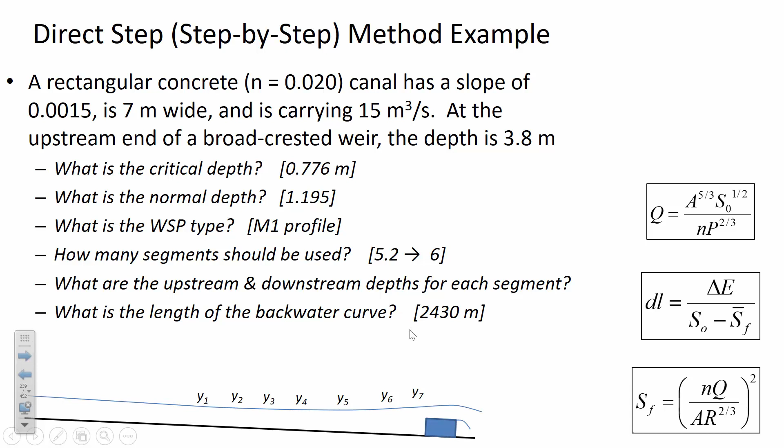And so what we did was we calculated that from this measured location up to where it matches back up with the normal depth was about 2,430 meters. Now, as we'll find through this example, the actual length may be a bit longer when we divide it up into more than 6 segments. So we're going to be adapting this example. Once again, we're using the same 7-meter wide rectangular channel.

And let's say that we have a 4-meter height that the water can be flowing through. If we think about this as like a rectangular trough that the water is going down and it's 4 meters tall on either side, but we don't necessarily know how deep the water is within that trough, except at this one control point where we have a measured depth of 3.8. So this is going to be what we call a boundary condition. And the boundary condition is just a location where we have a fixed measured known value, and then we work towards the unknown starting with that given.

Of course, the other things are going to stay the same, like the channel slope, the flow rate, the roughness. So all of that's going to stay constant. We're going to try and put that into HEC-RAS. Now, one of the tricky things in HEC-RAS is that the editor for defining what the channel geometry looks like is basically an XY coordinate system that we have to utilize.

By the way, does somebody have a marker here today? I forgot to grab one as I left my office. I can always count on you to hook me up. You've got so many colors to choose from. Thank you very much. All right.

So if we're going to be thinking about this rectangular channel, the things that we're going to be trying to find out is, first of all, in part A, if we go 1,500 meters upstream from the control point, how deep is the water? That's one thing that we're interested to find. And then the other is, how far do we have to go upstream until the water depth is within 1% of the normal depth? And we're saying within 1% because if we said exactly equal to the normal depth, because of the way that the numerical solver works, you almost never really get back to the normal depth.

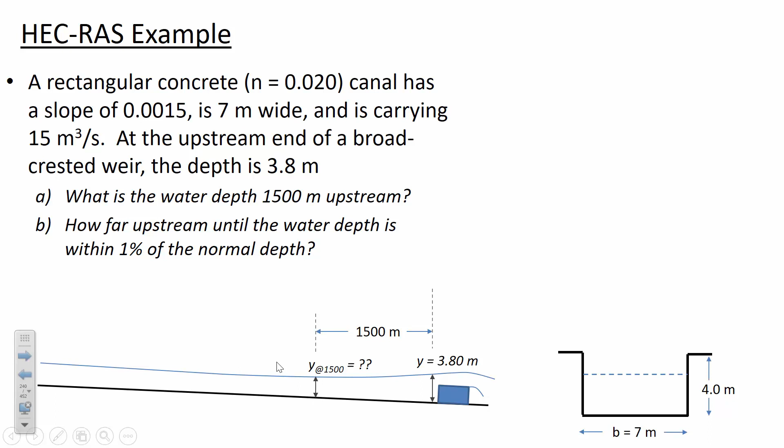That situation is analogous to this, where if we said we want to go all the way to the normal depth, this curve is going to be very infinitesimally still curved, but if we say within 1%, then it's essentially the normal depth, but we don't run into the problem of it being an infinitely long distance.

Okay, so just as a reminder, when we analyze the critical depth for a rectangular channel, we can use this easy approximation, the critical depth 0.776 meters. Solving Manning's equation with this channel geometry being rectangular, the slope, the n value, we get the normal depth. So within 1% of the normal depth, we're saying we want to know how far do we have to go upstream from this weir until the depth matches back up to 1.207 meters. So those are the two things that we're going to try to be solving.

Now the slope that's given, 0.0015, we kind of have to manually calculate what our elevations are going to be. And if we say, let's have the bottom of the channel be our elevation datum just upstream of this weir, so z equals 0 by our definition. We could have called it 10, we could have called it 100. Let's just call it 0.

Then if we go 3,000 meters upstream, that tells us that the channel bottom should be 4.5 meters as elevation. And that's just multiplying this 0.0015. That's 0.0015 meters of elevation for every meter of horizontal length that we're moving upstream. So if we're moving 3,000, the delta z is 4.5. Okay, so is everybody with me so far on what the geometry of the channel looks like? Everybody understand what we're trying to figure out with HEC-RAS?

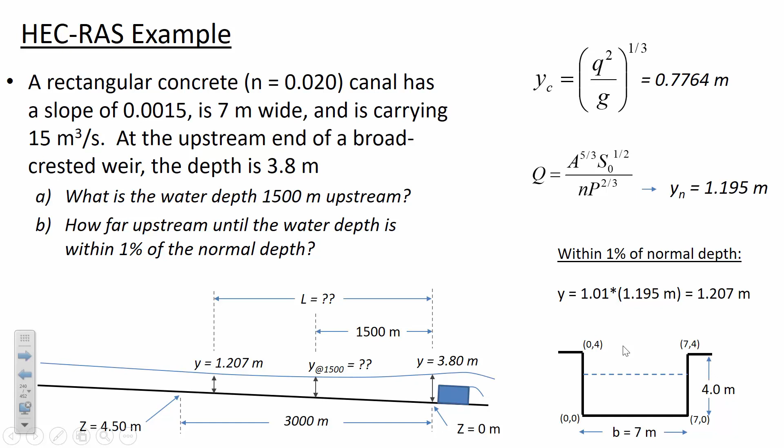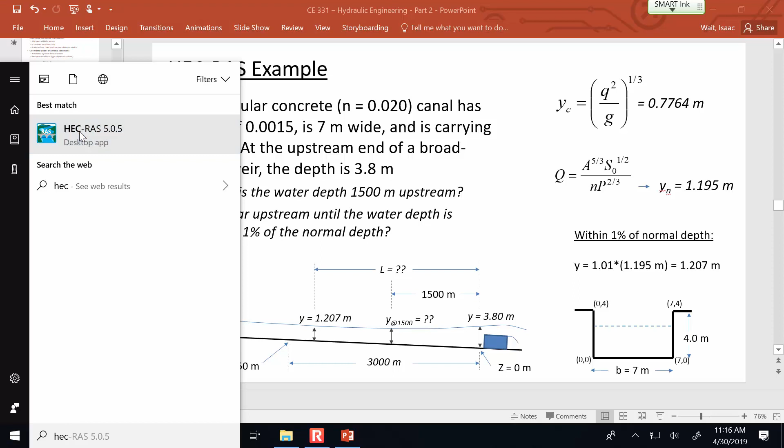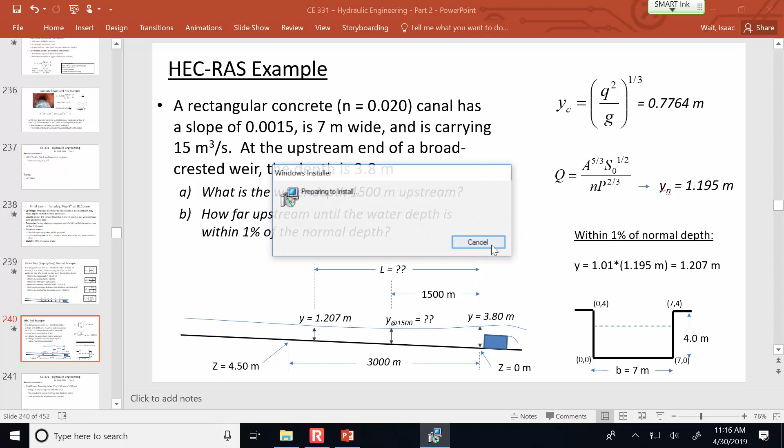All right. Well, let's start up the program. I'm not sure if it's installed here on this machine, so I'll probably have to, oh, it is, good. I was going to remote into my desktop, but this is even better. Autodesk Inventor. Not sure why it thinks that's what we want. Maybe I will remote into my machine. All right.

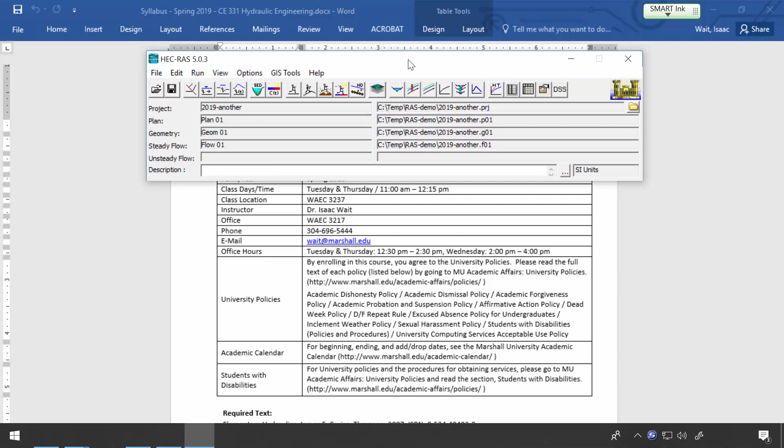All right. So let's start from scratch. New project, and we'll give it a name. You put it in a directory that you're going to be able to find again, and my suggestion is to create a separate folder. Don't just put it on your desktop, because it's going to create several different files as we go through the process of creating geometry and doing a steady state run.

So create a subfolder here with this button. I'm going to go into my temporary folder, and I'll call this 331-RAS, and create that folder. And then I'm going to call it Tuesday Demo. All right.

Now it looks like the units are, it just gave me a warning that my unit system is US customary. Oh, no, System International. Okay, that's what I want. But in your case, down here at the bottom, it's confirming what units we're in. By default, I think it probably comes up in US customary units, so you're going to need to go to Options, then Unit System, and switch it from US customary to System International. Okay. I'm going to set that as the default.

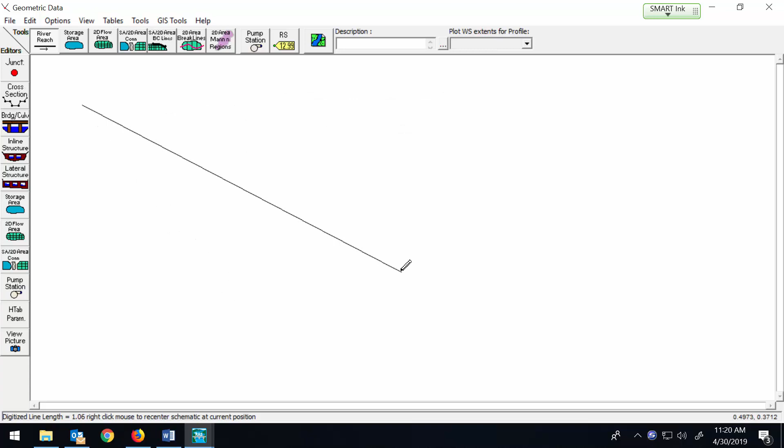All right, so click on River Reach. This is a top view. That's the start of my river, I'm moving over sideways. It doesn't matter if it's low or if it's high. This is just like a schematic diagram. It's not implying any particular length, but double click at the end. By double clicking, that means we're terminating this river.

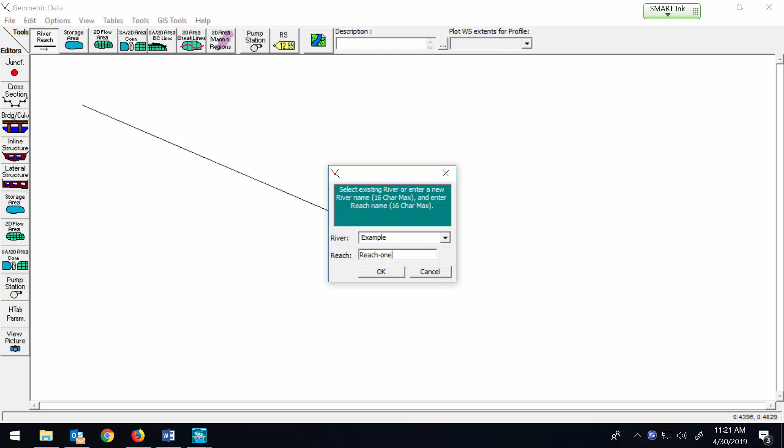I'm going to call this river Example, and the reach is going to be Reach 1. Now, you can have multiple reaches on a river, meaning that, for instance, there may be side channels going up some particular holler, but they're all part of the same river system. All right, so it's got a name, and you can see it's put it in that top view, and the direction of the river is implied by where I clicked first and where I clicked second.

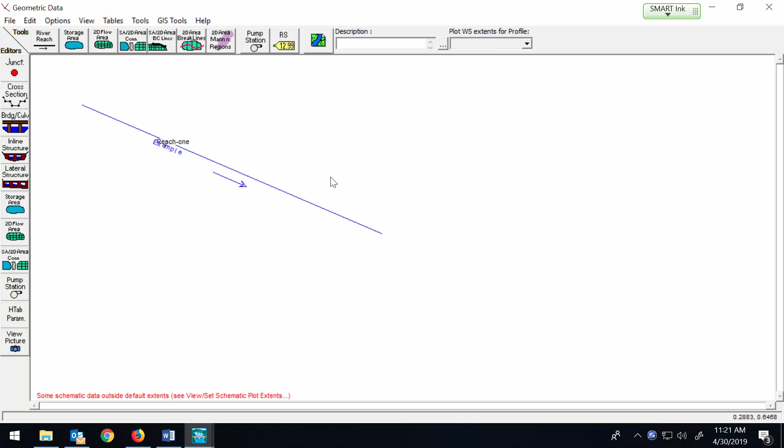All right, so next we want to create some cross sections. So we're going to add a new cross section. Here, under Cross Sections, edit and/or create cross sections. Click on that. And here's the box where we're going to enter the XY coordinate data. We're going to start with this location 3,000 meters upstream.

Just to refresh your memory, I think we might be able to create one model that answers both questions, because we're essentially trying to figure out how far of a length until it gets to 1.07 meters. So if I create this entire segment of 3,000, I suspect this unknown length is going to be within that 3,000 meter distance. And the other thing I want to know is what's going on at 1,500 meters. So I'm starting at the upstream location.

So let's put in the coordinates. Now, the upstream location, the geometry looks a little bit different. This is our downstream section, the x and y coordinates for the downstream. But the upstream, because the z is 4.5, that means this top left is going to be 0, 8.5. The bottom left is 0, 4.5. So these are x and y coordinates.

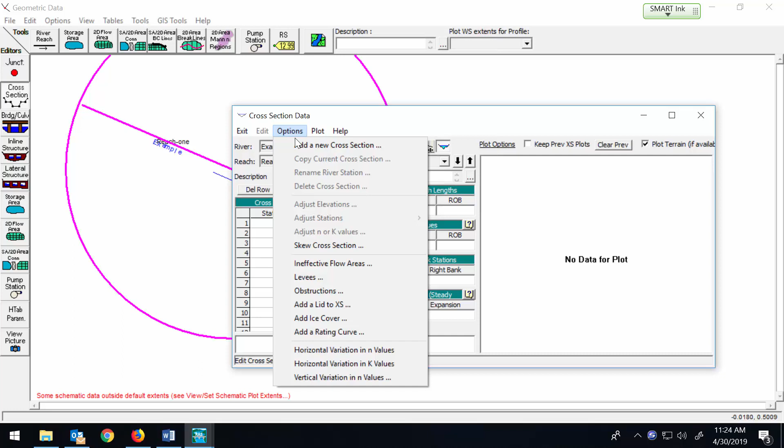So Options, Add a New Cross Section. And it asks you what's the station, meaning how far upstream or downstream is it? So again, we're on the cross-section data, Options, Add a New Cross Section. We're going to put this in at 3,000. That station means it's 3,000 meters upstream of where we've measured the depth. So at station 3,000, and now it's naming that station 3,000.

Now hopefully we'll be able to type in the coordinates, the x and the y. So 0 is the station. The station this is talking about is measuring the cross-section starting at the left side. So there are the stations that run along the length of the river, and then there are the stations going side to side to define the channel geometry.

So this station is just saying how far from the left edge of the channel are different features. And so 8.5 is that elevation. And also at 0 is elevation 4.5. Then at station 7, 4.5, 7, 8.5. So why 8.5?

Well, remember that what we've said is that this is basically like a trough, a 4-meter tall trough that is going upstream. And so if we have the z is 4.5 meters and another 4 on top of that, it means the top of the channel will be at 8.5.

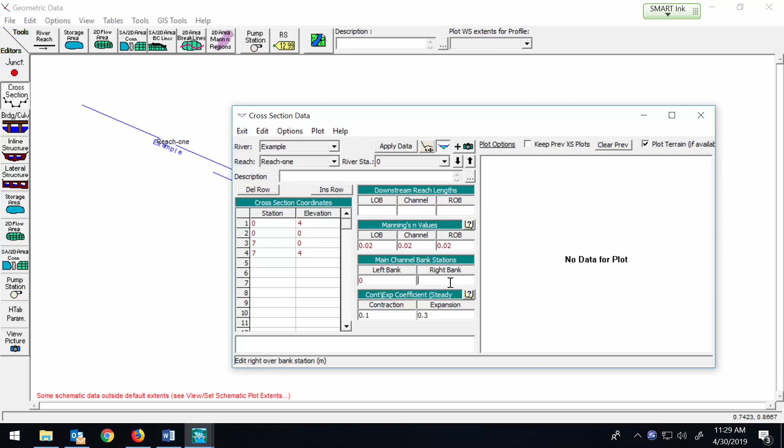The n values have already copied over, which is good. And then the left bank is at 0. The right bank is at 7. And we click Apply Data. And the bottom of the channel is down at 0, so it's at our elevation datum. The top goes up to 4 on both sides.

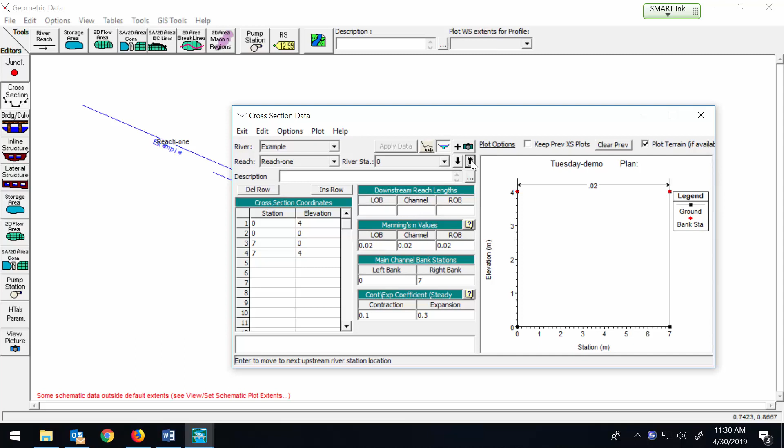So what we have right now is 2 stations, and we can toggle between them using these arrows. We've just got these 2 segments. But the nice thing the program will allow us to do is interpolate linearly between these 2 sections. So if we do it in 300-meter segments, if I wanted to break it into 10 segments, then I could type it in manually a bunch and have to continue calculating what's the delta z and all that. Or we can just see about interpolating it automatically.

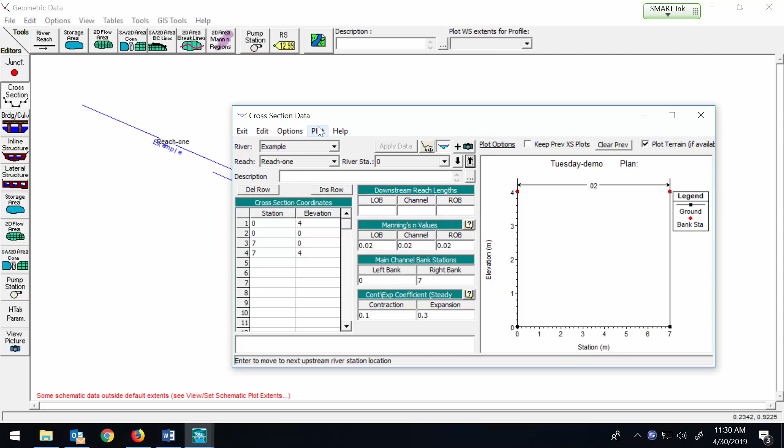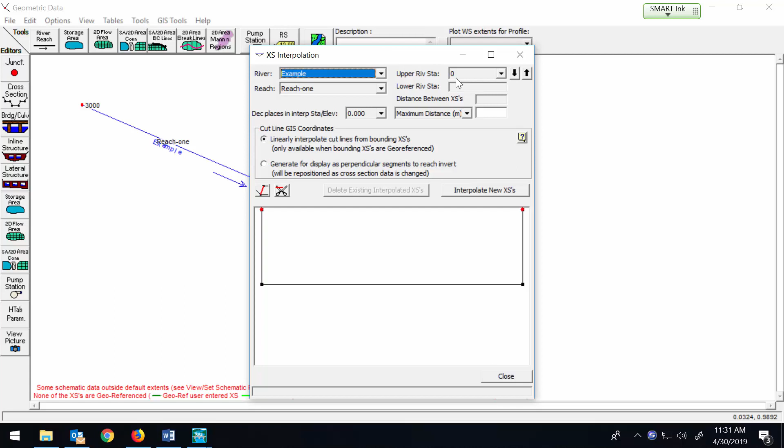All right, so under Tools, I think what I do is close this window. Tools, cross-section interpolation, and we're going to do it between 2 cross-sections. Okay. So it'll bring that up, and the upper station is at 3,000. The lower station is at 0, so it knows which 2 stations it's going to be interpolating between, and it reports back that it's 3,000 meters between them. And then let's have it be a constant distance of 300 meters.

Just to see what happens. All right, and then click Interpolate New Cross Sections. All right, so it looks like what we're seeing here is a front view of all of those different cross sections, and so we can see that the initial depth is down here at 0.

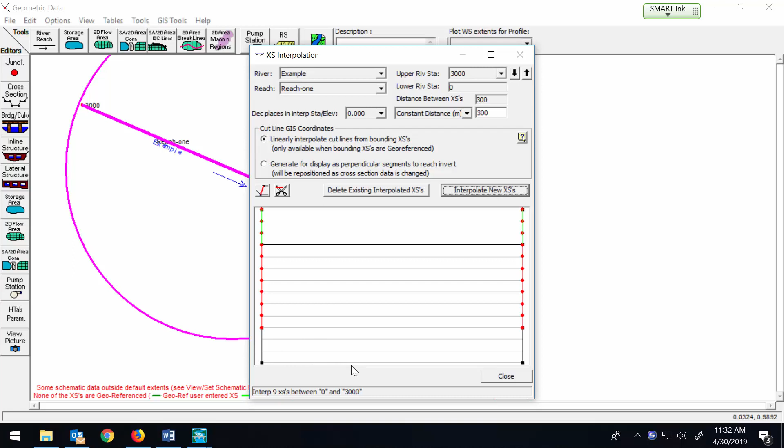Then, well, we can close that and investigate each of these sections together. So if we bring up the cross sections menu again, then we can flip between them. So if we go starting at the 3,000 now, 2,700, 2,400, and so check the elevations, and so we're at 4.5, 4.05.

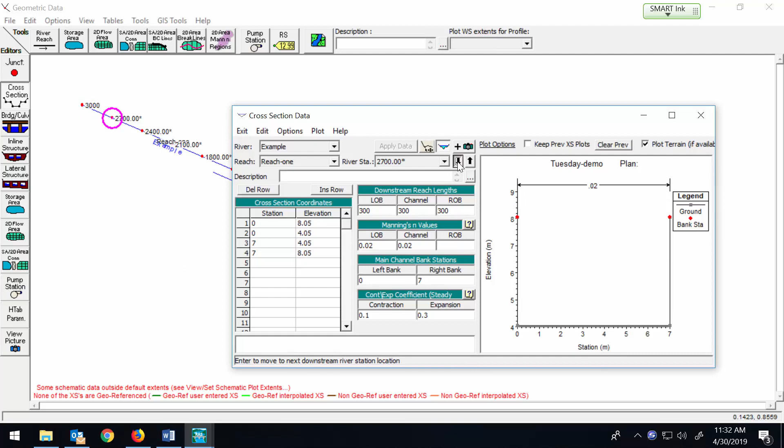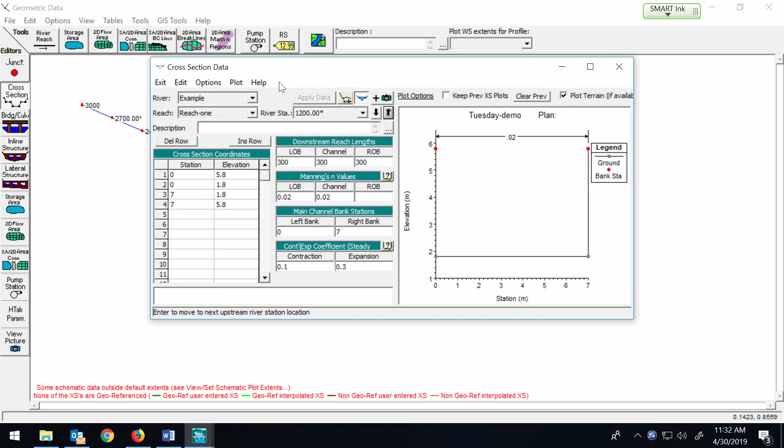So what it's done, and you can see in this window, it's continuing to highlight the cross-section that you're on as we go down, and it's rescaling this view on the side, but it's measured all of these reach lengths, and then we get to the end. We get to 0. All right, so it seems like it did what we would want it to do in interpolating those. And so we can close this, and then maybe it's a good time to save.

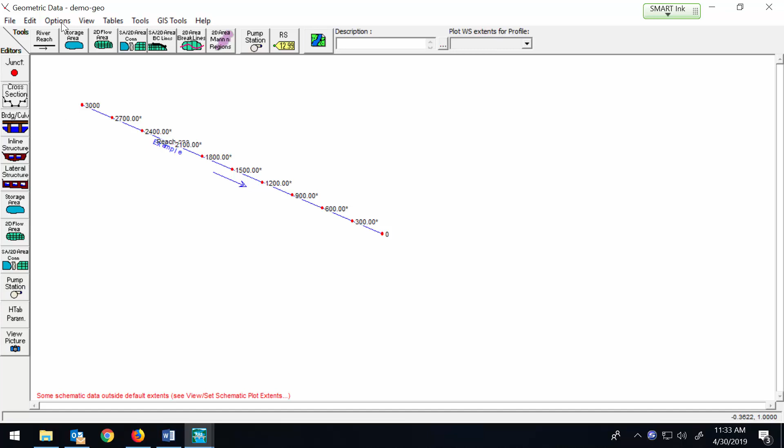File, save geometry. So I'm going to call this demo geo. All right, so now I've saved the geometry. All right, let's take a look if we close this geometric data. This is still open, so let's save everything. Click the disk symbol, save everything, and now it tells us we've got a project, we've got geometry.

What we haven't told it anything about yet, though, is we haven't told it about the 15 cubic meters per second, and we haven't told it what the water depth is at that location where we know it. Remember, at this control point where we've measured the depth and it's known to be 3.8 meters, well, HEC-RAS doesn't know about that yet. So let's give it that information.

So here is view/edit steady flow data. So the Q is constant. That's, I guess, a symbol for steady flow, whereas here it's unsteady flow because the flow rate is going up and then it's going down again. So we're going to do steady flow. Click on that. And let's set PF1 to 15 cubic meters per second.

So see down at the bottom, it'll give you hints on what it is we're entering here. Edit steady flow data for the profiles. And so the water surface profile, we want it to do a graph of what's happening at 15 cubic meters per second. If we wanted to, we could add in other flow rates and it could analyze them in the same model so that we could flip between, show me what does the water surface look like at 15 cubic meters per second, at 20, 25.

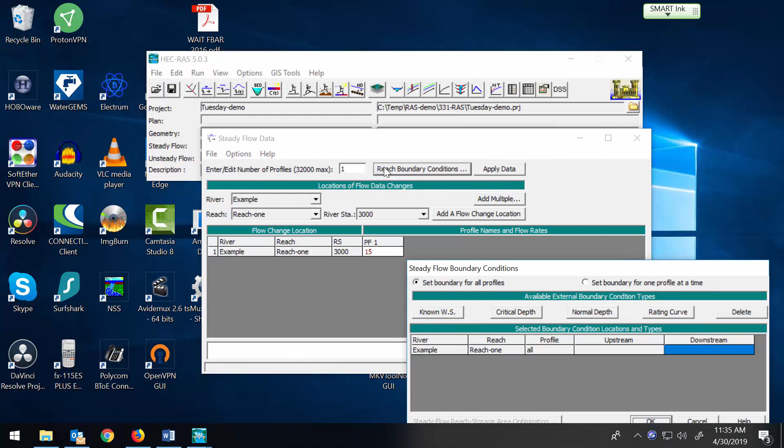So we could add additional rows to this, but we're just going to analyze it at the single 15 cubic meters per second. All right, now we also need to set a boundary condition. So here under Reach Boundary Condition, click on that, and we have a few different options. There's different things that you can tell that are governing. And in our case, what we want to have it do is start with a known water surface. So it's this downstream known water surface.

When the flow rate is 15 cubic meters per second, then the known water surface elevation is 3.8 meters. So 3.8, and it's asking as an elevation above the datum. It's not just asking about the depth, and so it's kind of just fortunate for us that we said that our datum is going to be at the bottom of the channel at that downstream section. You know in the homework how you had to keep track of a separate depth versus water surface elevation? Here they're one and the same.

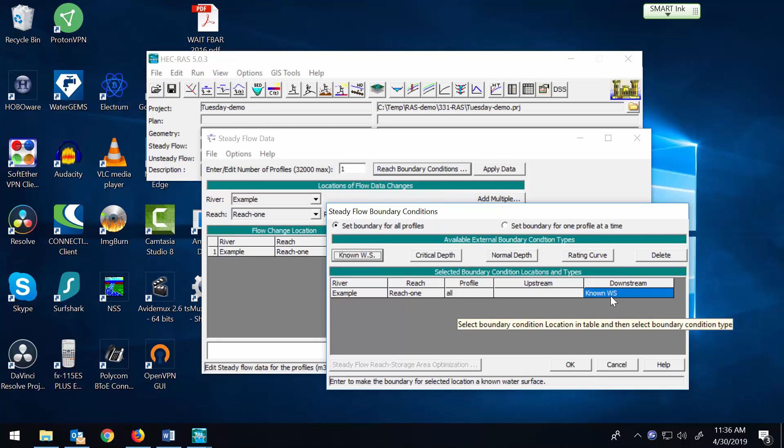Okay, so click OK, and now it says that what's governing this boundary condition is the known water surface elevation that we've just set. Okay, so we can click OK and click Apply. I think it automatically applies, but let's click Apply just in case. All right, so everything's set. Save flow data. Example flow.

Okay, so now if I want to open this up in the future, it would already have the project defined, which is that top view of my system of rivers and reaches. It would have the geometry defined and then our steady flow conditions. So now what we're going to do is perform the steady flow simulation. These icons are the greatest. See the guy that's running on a flat line? So that's a steady flow run. I guess he's running. So we're going to run the model steady.

So click on that, and we have subcritical flow regime. And how do we know that? Well, because we calculate the critical depth is less than the normal depth. Okay, so subcritical is correct. It knows the right geometry file. It's got the correct input for the steady flow file. So in other words, it's sending this water through this channel. And click compute. Hopefully no error messages.

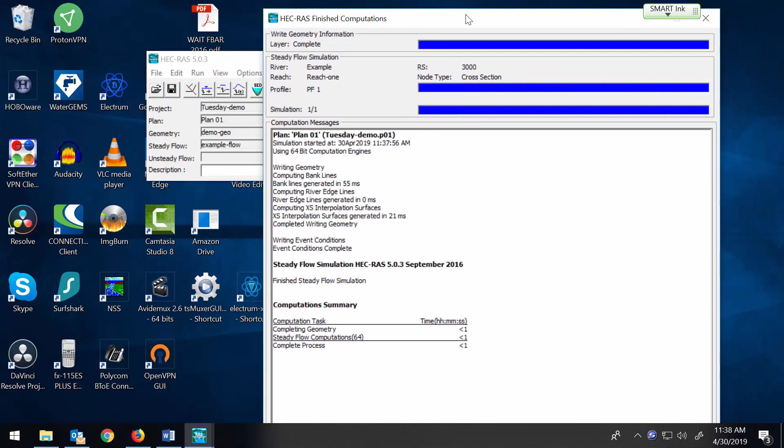Seems good. All right. So now what we can do, close this, and let's take a look at the cross sections again. With any luck, what we'll see is that there's water in those cross sections. There it is. There's water in those cross sections. So here we are at River Station 1200. Let's go down to 0.

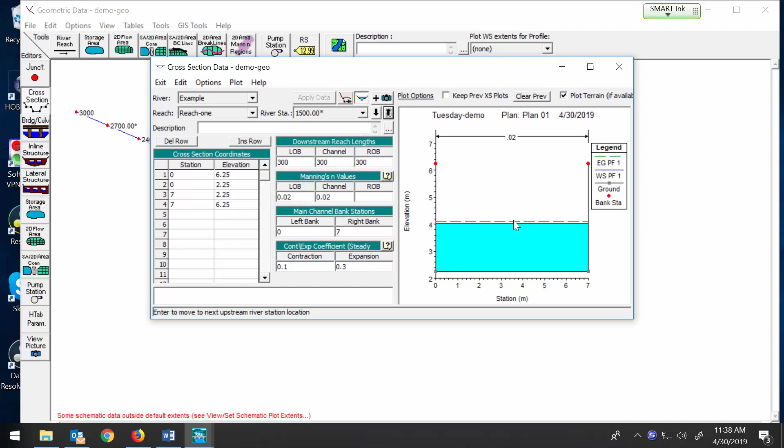So is the water depth at 0 what we told it to be? 3.7? Yeah, it looks like it does have that 3.7. But as we work our way upstream, for instance, we wanted to find out what's happening at 1500, right? That was one of the questions in this example: what is the water depth at 1500? Well, we can see from this graph that it looks like about 4 meters of elevation is the water surface elevation there.

And then what we would do is subtract out the bottom of the channel. So the actual water depth would be 4 minus 2.25. So it's about 1.75 meters. In just a bit, we'll take a look at copying this data and pasting it into a table. But if we're just visualizing things through the cross-section, the depth of the water is from the bottom of the channel up to the end of the blue.

All right, so it was 3.7, and now it's down to about 1.75. So it's definitely getting shallower as we move upstream, which is what we expect. Remember that we expect that it's eventually going to match in with the normal depth, 1.2. So it's getting close already. It's at 1.75 here at 1,500 meters upstream. So the question is, how many segments do we have to go until we see this depth of 1.2?

So if we move upstream again, now we're at 1,800 meters. It's getting a little trickier. I wish there was some easy way to dimension the depth on this cross-section. There probably is a way, it's just that I don't know it. We will take a look at the table in just a moment. But as we keep working upstream, what we see is that the water depth is getting shallower. Eventually, we get to this 3,000.

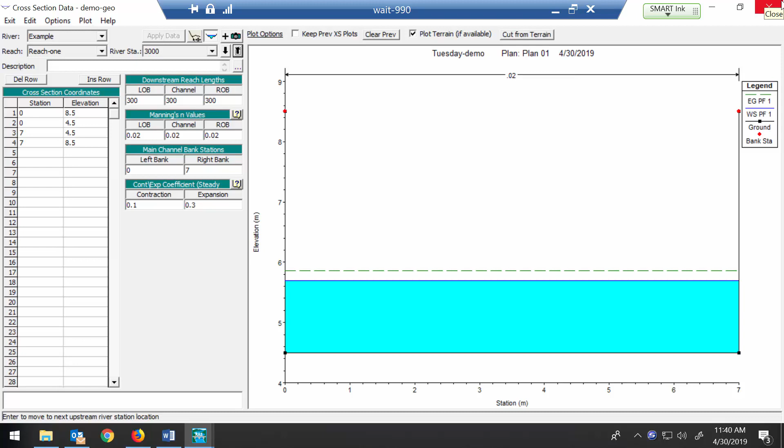And so let's take a look at getting the view table. And so here under tables, no, actually, I don't think it's there. We're going to close this. So back here in the main menu, we've got a summary output table by profile, and we can also do it one cross-section at a time. So if we go back to that 1,500, which is a point of interest for us, it'll tell us the exact water surface elevation at that point.

It doesn't give us the channel, oh, there it is, the minimum channel elevation, 2.25. So the depth would be the water surface minus this minimum channel elevation. Though it doesn't look like they've done that. Oh, wait, hydraulic depth, there it is, 1.77 meters. Okay. So the depth is 1.77 meters at that halfway.

So then let's move upstream, because what are we looking at? We want to see we're within 1% of the normal depth, so 1.207. Okay, so if I go upstream again, and I'm keeping an eye on this one, are we at 1.207 yet at 1,800? No, the hydraulic depth is now at 1.48. We're looking for 1.2. Okay, 1.29. We're getting pretty close at the 2,100. 1.22.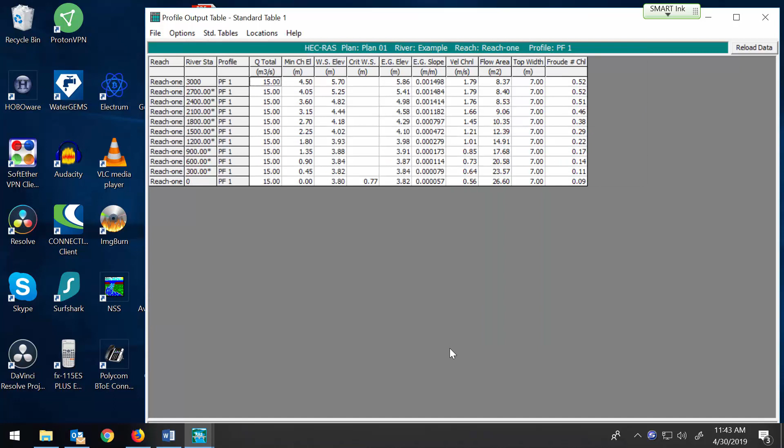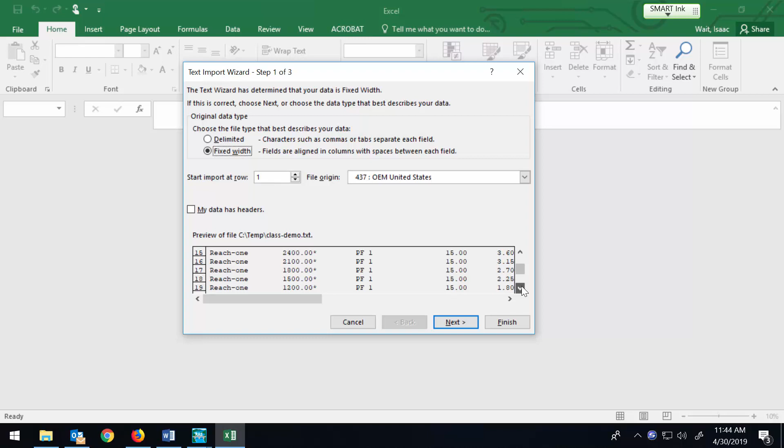All right, so I'm going to call this one class demo.txt, and then if I open up Excel, let me open up that class demo text file, and we'll just take a look at what's in there. So we're getting the import wizard here. I'm not sure how this is delimited. Maybe spaces? Yeah, might as well.

No, it's not giving us a tremendous amount of precision here. Like if the main thing we want to know is the elevation, yeah, that's an interesting question. Let me ask some of the people I know who are a little bit better at the program, because I'd be curious to know if we can get a greater degree of precision.

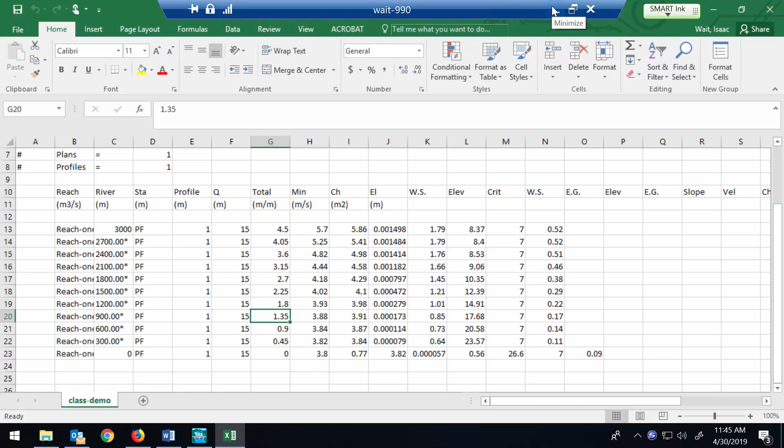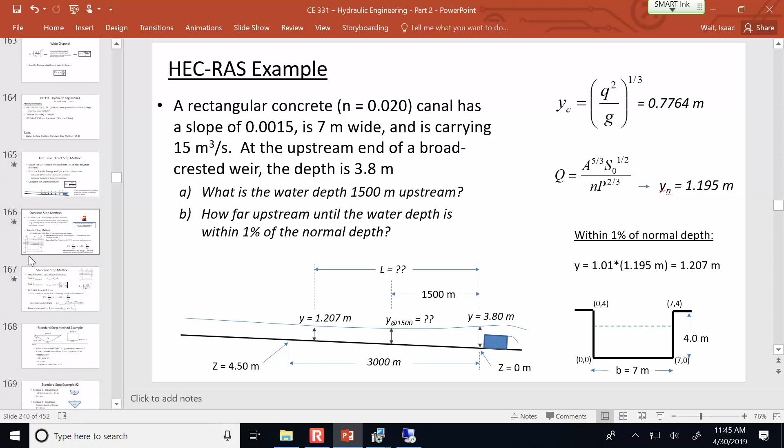All right, here's what I'd like to do. I would like you to try solving another one of these problems that we've worked in the past using HEC-RAS, and it is the one where it transitions from a trapezoidal channel to a rectangular channel. So let me bring that up. Let's try and adapt this example.

So it's in traditional units. We've got an n value. We've got an expansion coefficient defined. So in this one, the water depth was known to be 5 feet at section 1, and then we were working upstream towards this rectangular.

And the cool thing is HEC-RAS is going to be able to gradually open up that transition. So we aren't just going to be doing it in a single step, like immediately going from rectangular to trapezoidal. So my suggestion is let's do 1,000 feet between them.

So define this downstream section 1, define the upstream section 2, and of course the station will be 0 for section 1, station will be 1,000 for section 2, and then have it interpolate in increments of 100 feet. And then let's find out basically what's the water depth doing at each of those locations, and the location that we're most interested in is going to be at section 2, where we want to find out what is the water depth there.

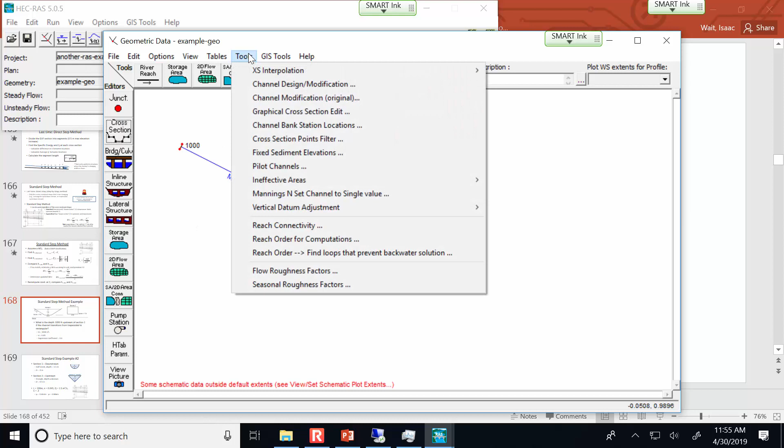So the known is this known water depth is 5 feet at section 1. And so we're working upstream. We want to know how deep the water is going to be there. So whenever I switched it back over to custom reading, just for the sake of trying, it looks like everything remained the same as far as the coordinates? Yeah. All right. Cool.

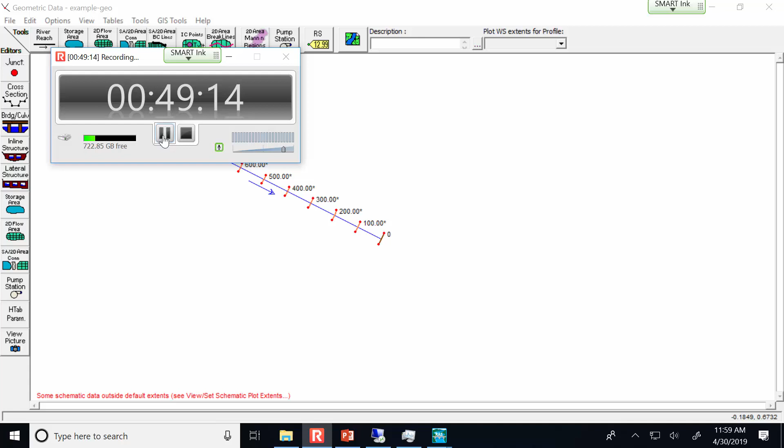Okay, so after you interpolate your cross sections, and here's my starting cross section. I had 0, 10, 10, 5, 35, 5, 45, 10. That defines the trapezoid. Okay, and then the other one that was defined was the 1,000. So just to go back here, 0, 10, 10, 5, 35, 5, 45, 10. That's the cross-section of the trapezoid.

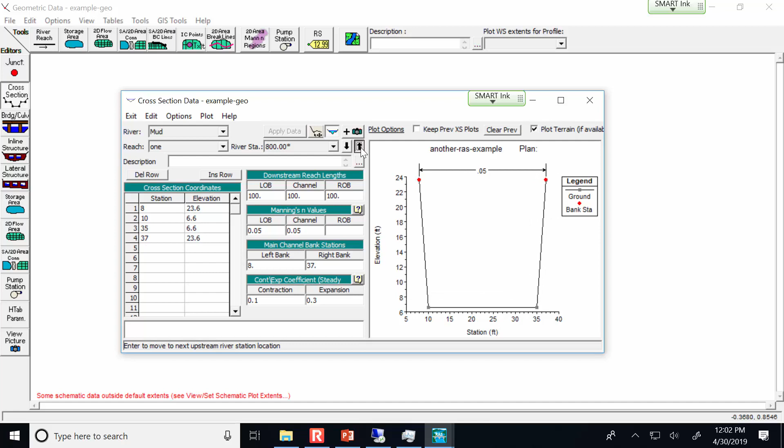And then at 1,000, it was this rectangle, and I interpolated. And if you scroll through, you can see that gradually in the interpolation, what it's doing is it's becoming less trapezoidal and more rectangular until finally we get up to 1,000 and it's perfectly rectangular.

Okay? So then what I want to do is I want to view edit steady flow data, and I have to put in the flow rate. So down here, edit steady flow data for the profiles, 1,000 CFS. So I have 1,000 CFS in the givens. And then I also want to take a look at the reach boundary conditions.

And the boundary condition is that the downstream section, here at 0, the known water surface elevation is 10 feet. Now, does everybody understand why I said 10 feet is the water surface elevation? Because in the sketch of the problem, it says that the water depth is 5 and the invert is at 5, so we're measuring all of the elevations relative to that datum.

Okay. So we've got a known elevation, we've got the flow rate defined here, 1,000. I think that this 1,000 is like how many calculations it'll do before it finishes. Yeah? Does it matter if you select the river station right there too, even though you're on river station 1,000, we're talking about water surface here? Station 0, yeah. I didn't know if it's 0 there and then put your conditions. Well, let's find out. I'm not sure.

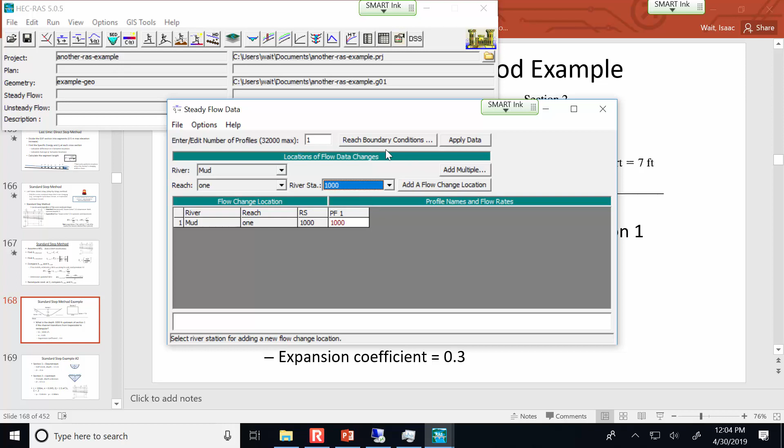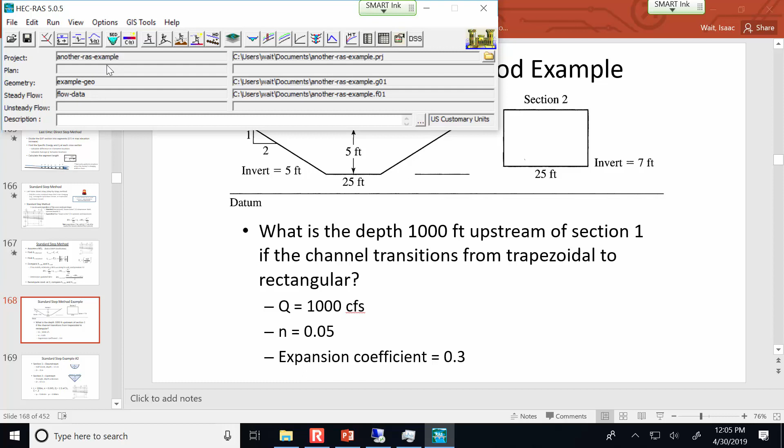Okay, so remember, the way we think about this, the geometry is the trough, the channel that the water is flowing down. The steady flow data defines the depth at one of the locations and how much water is flowing through. Now, this is just a mystery to me whether it's actually going to run, but I'm going to perform that steady flow. Subcritical conditions. Well, let's see what it says. The trick could be that it might not be deep enough upstream. I've made the channel 20 feet deep. Hopefully that's enough to hold the water. Let's see.

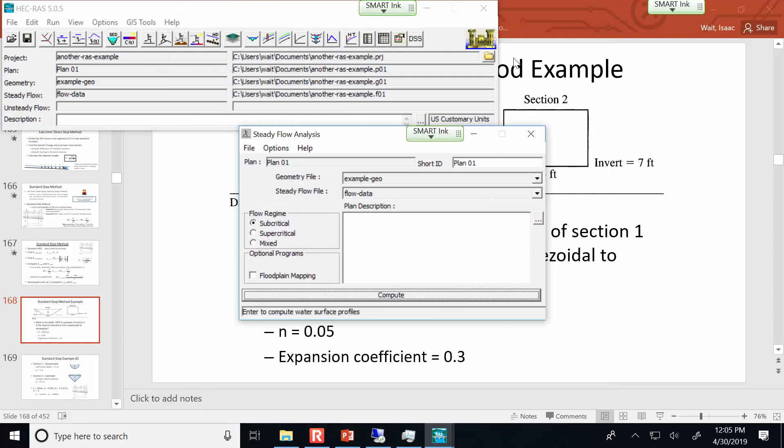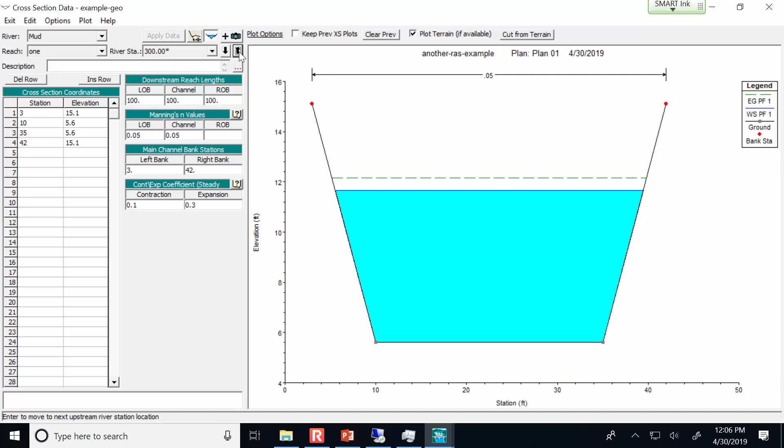If I pull up the cross sections, then that should give me an idea of what's going on with the water. So starting here at 0, what I want to see is the water depth of 5 meters, so feet, excuse me, from 5 to 10. So 5 feet deep. And then as I work upstream, it seems to have worked. Anybody want to guess what this, oh, I guess you don't have to guess, there's a legend. The dashed green line, it's the energy grade line. So it's the depth plus the velocity head, so it's graphing the energy grade line.

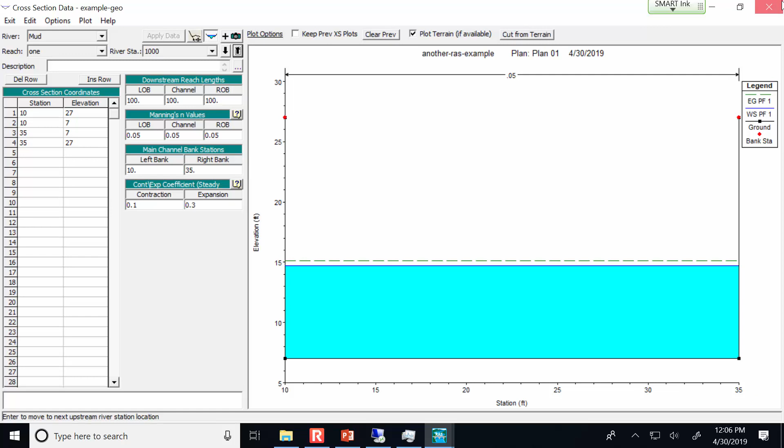So if I want to know what is the water depth at that section where it goes back to rectangular, where was the place that it was convenient to look at those on an individual basis? This detail here. So 1,000 is where it's rectangular, and my hydraulic depth is 7.69 feet. I didn't bring my notes to see when we calculated this. I guess I could pull open the Excel file, but remember we did it in a single step. What was the depth in that example? Let me see if I can pull up the spreadsheet version of that one. It's going to be different because we divided it up into so many other sections.

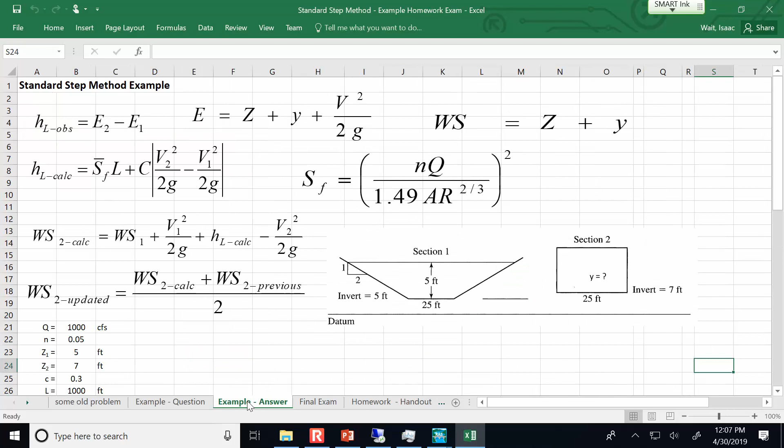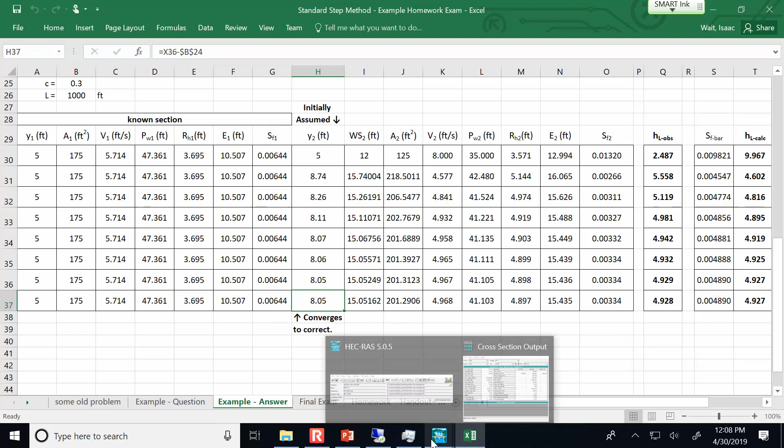But, standard step method. So in this one, it was converging to that section 2. It calculated the depth was 8.05. So HEC-RAS is saying 7.7, and you'd expect there to be some variation because all of these different rows, it doesn't represent multiple sections, remember. These are just different iterations. So it agrees well enough. I'm not too scandalized by the difference between the two, considering that we've broken this up into 10 segments where it's gradually opening up the sides. All right.

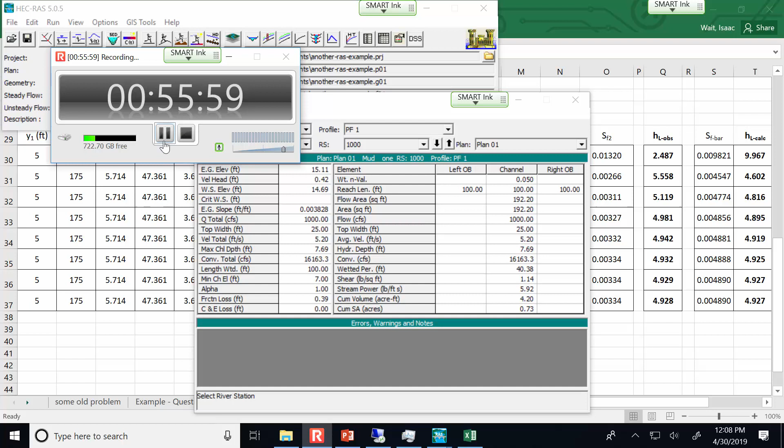I don't like hearing that question, so I'll just tell you this won't be on the test. It was just for your learning. So just for your edification, maybe someday you'll have an opportunity to use this, and if you do, it'll be installed on your laptop, and you'll know that you've got a recorded class video you can track down on YouTube where you work through a couple of examples.

All right. Free of charge. Free of charge. Yeah, all you have to do is sit through a commercial.